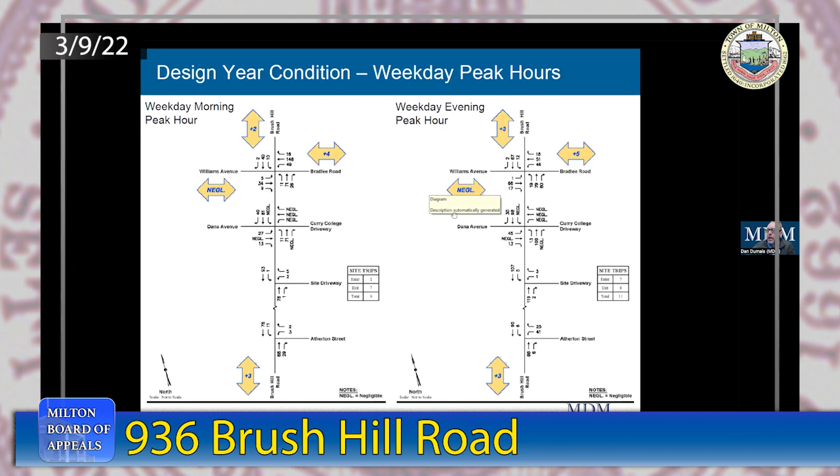And well below a 5% increase in traffic for any major intersection here. So what does that mean in terms of operations?

We looked at level of service again at the 4 study intersections, with the site driveway being the one on the bottom. We looked at a baseline condition for 2021, and then 7 years in the future without the project in place, using background growth based on a count station from Mass DOT. Then for the build condition, we add the project on top of that to see the incremental impact between a no-build, without the project, and a build condition 7 years into the future with the project.

We looked at V over C, which is the volume to capacity—what's the volume of the road approach compared to the capacity of that approach. The delay in seconds, and then level of service, which is a letter grade A through F, with A being the best and F meaning more delay.

The PM is very similar. We have a level of service B here in the middle, but still very good level of service, with no change from the conditions without the project in place. The site driveway is going to continue to work at level of service A, with very low delay there. We saw the safety was fine.

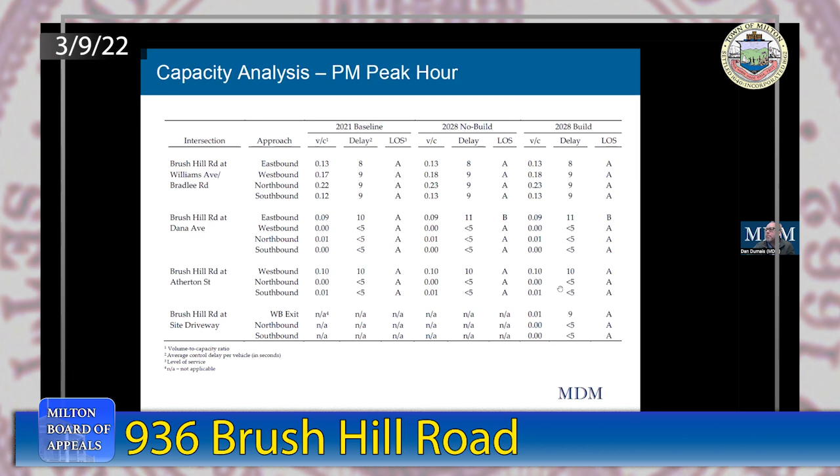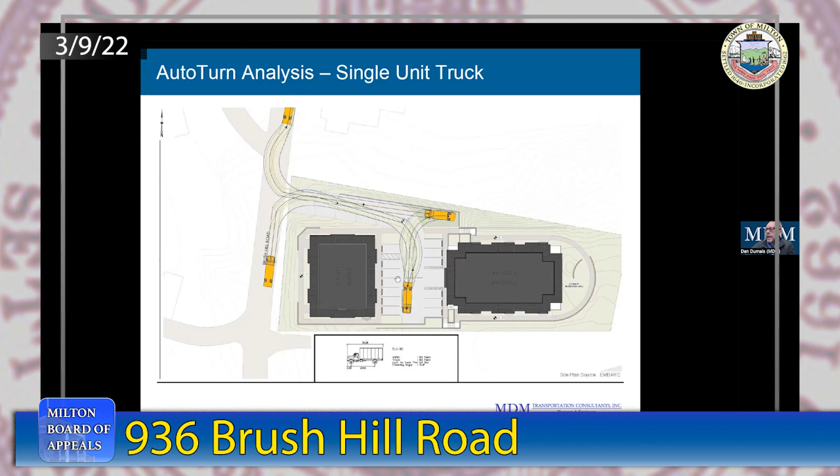Kind of a summary on the overall project: you have ample roadway capacity. As you saw, there's limited roadway impact in terms of the sight lines and the level of service. There's no real safety problem out there in terms of crash history at the intersections.

We have sidewalks on site that's going to connect the parking areas to the building entrances. Bike racks for residents and visitors—I have some visitor bike racks outside, and I believe some interior secure bike racks, weather sheltered within the garage area. The driveway design has been designed to satisfy the safety criteria for intersection sight distance, as well as single unit trucks and emergency vehicles.

We have adequate sight lines for the SSD and ISD for not only the safety-based criteria, but also the operations ideal-based criteria. As part of the project, they'll maintain the sight line triangles for the driveways to maintain that adequate sight lines. That's kind of a quick overview. I'd be happy to answer any questions the board would have at this time.

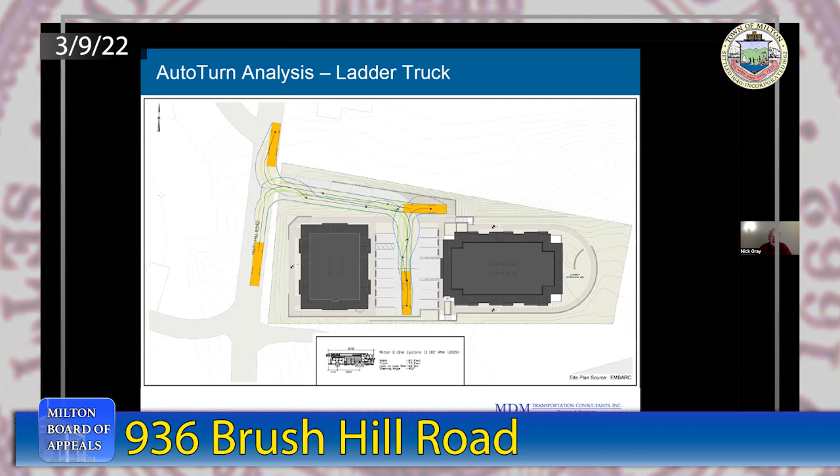Please, can we go back to the auto turn analysis for the fire truck and the box truck? You've taken it off—I'll put it back up for you. To my eye, that looks extremely tight. I'm looking at what are the factors that go into determining whether that's appropriate spacing to allow the fire truck to get in.

It looks like it would have to be an absolutely perfect, ideal circumstance to get a truck in and out of there. So the green lines here are the wheel tracks—they make it pretty easily. This blue line on the outside, which goes a little further, is the overhang of the ladder. So the movement going in comes into this area here. It kind of looks to me that the blue lines are impinging on the spaces. Is that an appropriate design?

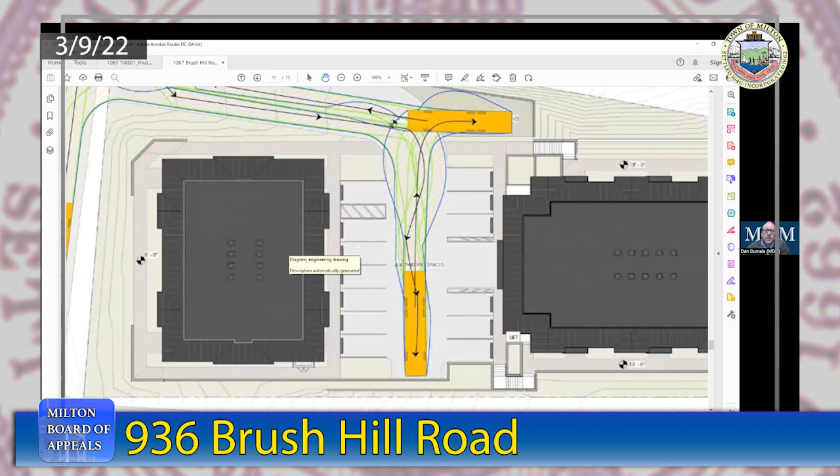So it's adequate. They do not go within the spaces themselves. That's correct, but it looks like it's basically tangent with the top of the line there. So your testimony is that you believe this is adequate spacing to get the fire truck in and out of there? That's correct.

All right, let's go to the box truck, please. Really the same question—I look at that and it seems that this truck is coming perilously close to the spaces towards the end, the north end of that lot. Is your testimony that's appropriate and adequate for the level of service necessary for these buildings? That's correct for the 20 units. So the line coming in would be a little thick line, but it's this line here.

Okay, does this take into account snow? The snow removal, the placement of snow—how would that affect it? It assumes that the snow is not within the areas that it would need to use, so the snow would have to be removed. If the parking spaces are—obviously we haven't looked at how the snow is going to be removed from this lot yet—but if the snow were pushed into the space towards the curb on this side...

That's going to shorten the amount of space available for the car, and it seems to me it would interfere with the truck. So under that circumstance, you'd probably be correct—they would need a snow removal plan to make sure the snow is either pushed into space that would not impede the movements of the vehicles or the fire truck, or it would be trucked off site. I'm not sure what the final plan is going to be. I know it's early days yet, I'm just thinking out loud.

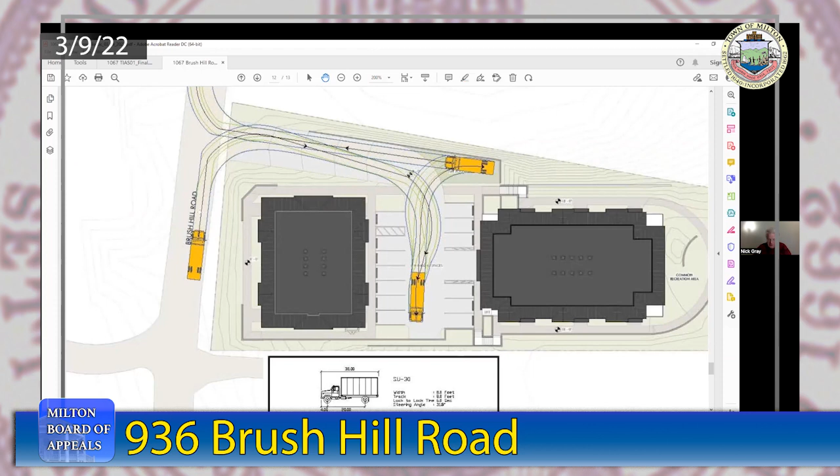The last question I had is since I know based on our site visit that the amount of traffic this project will or will not generate is going to be a major concern of the residents, can you explain how the trip generator works, what are the inputs into that? I know the figures all show everything's going to be hunky-dory, but I'd like to understand better what goes into coming up with the calculation for the numbers you have on that page for this particular project. How do we get those numbers?

So there are individual trip rates for multifamily units through the Institute of Transportation Engineers. They have a manual, and they have various sites throughout the United States, and you put in the number of units. They would have gone out to actual facilities and counted them, and then estimated per unit what a rate would be. So we put in 20 units, and it would tell you the in, out, and the total number of trips for the morning peak hour, evening, or the daily.

So the number of units is the input here? That's in this particular case, it's the number of units. You could also use, if it was an office building or something, per 1,000 square feet would be another generator. Okay, so the number of parking spaces available is not a factor in determining those numbers?

That is correct. Nor the number of beds in the facility, in terms of maybe people having more than one car, for example? So it's purely 20 units. The units could be any size, but there are 20 units, and this is what the manual put together by the society says is correct.

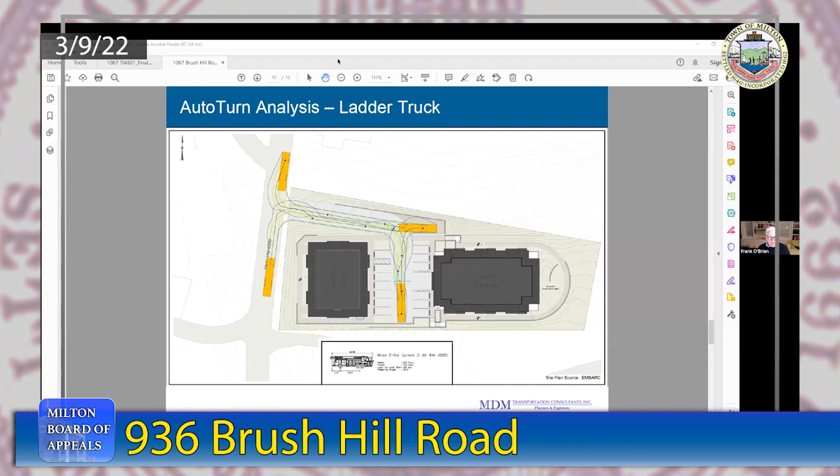I'm going to associate myself with Mr. Gray's remarks. This just looks awfully tight to me as an interested observer, and I'll give the firefighters of this community their due in terms of apparatus placement and driving, but it almost looks too perfect. If you've got a snow situation, or a vehicle in one of those spaces that isn't parked perfectly, or is larger than normal, then it seems you'd have a potential situation that could make it more difficult for a fire truck to access that.

I assume those spaces at the end are similar in size to the spaces throughout that area. I know there was some conversation about compact spaces, and maybe those were located in the parking structure. Correct, yes. The compact spaces are all within the garage. All of the exterior spaces are full standard size spaces.

All right, thank you. Also, sometimes I suffer from the inability to see things directly in front of my face. Does this particular diagram note the placement of the dumpster, the trash receptacle? This one doesn't. It should be in this area right here. The dumpster should be approximately right there.

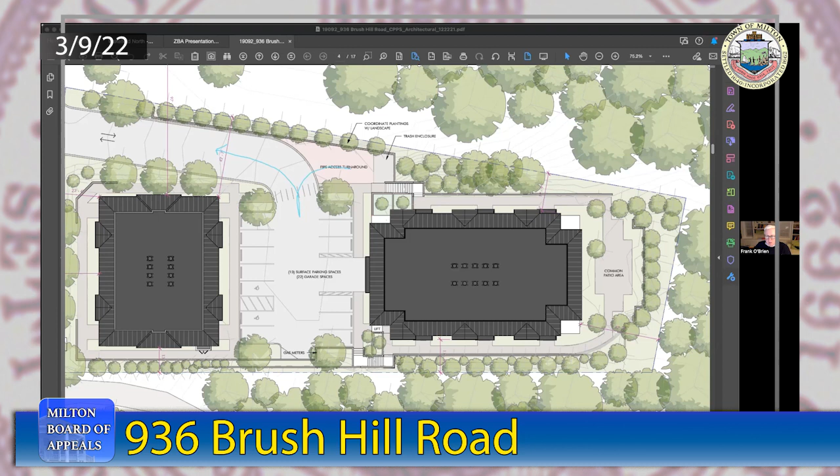Thank you, Mr. Mullen. Mr. Schomer, anything else you'd like to add? Nothing further, I'll go ahead and take down my screen share. That was the plans filed, I believe, December 23rd, for your reference and for anyone interested in reviewing that plan. That's the architectural set.

Thank you, Mr. Schomer, I was just happy that I seem to remember it. At this point in time, with Mr. Reardon being unavailable, Mr. Schomer, do you have anything else you'd like to add? Because if not, I'd like to open it up for comments from members of the public. Nothing further at this time. Thank you. Mr. Galvin, anything you'd like to add before I open it up to members of the public?

No, I mean, I will tell you, we have significant concerns over the density of the project and its complete use of the site, but I was kind of saving those until we had Mr. Cheshire's comments. So I just wanted you to know that that is a significant concern. Thank you, Mr. Galvin, and thank you for mentioning that and letting us know that you and your clients have retained Mr. Cheshire.

Do you have a timeline on Mr. Cheshire's work product? I asked that from a scheduling point of view. I told him, not being aware of the further peer review, that I was thinking there might be project changes, and I didn't want him to review the project if it was going to significantly change because of the cost and expense involved. I'm sure that if there aren't going to be any major site changes, he'd be ready within a couple of weeks to provide our comments.

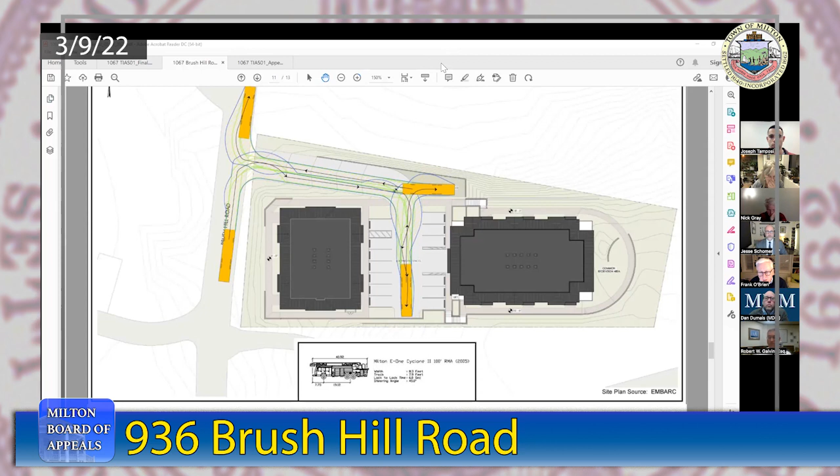Thank you, Mr. Day. I think, Mr. Dumais, it's probably a question I should have asked you specifically. What day of the week was the survey done? I think I floated around it, but didn't ask the question directly. The 24-hour count...

Was done on a Wednesday. The turning movement counts at all the intersections were done on a Thursday. Thank you. Typically for a traffic study, outside of a weekend or Saturday, for a residential project, it would be a Tuesday, Wednesday, or Thursday, a normal standard weekday. We try not to count Mondays or Fridays because they're sometimes atypical.

Okay, so if our ATR was on the Wednesday, then the turning movement counts at each of the study intersections was Thursday. Thank you, Mr. Dumais. And they were done in October, which is slightly above average season if you look by month. Thank you.

Mr. Day, I think you have an answer there. Do you have anything else you'd like to add at this point? I just want to make sure that with the parking situations, with the fire situations, with the delivery situations...